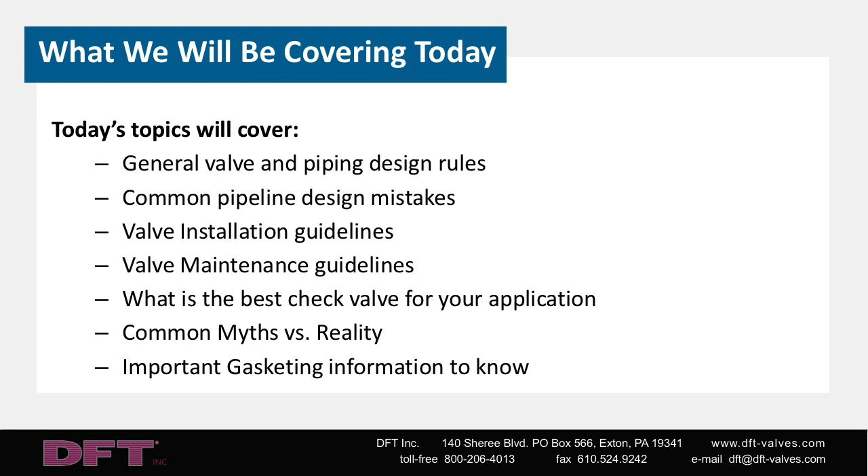With these 7 subject areas, there is a lot to get into, but it makes the most sense, at least to me, to talk first about just some general design rules for piping and system design that will lay a good foundation for what we need to talk about next. And we'll probably set the stage for maybe some questions that'll pop up. If you have those questions, please feel free to send them in. There is information contained in the webinar information up front that will give you the email address to send your questions to. If I don't get to answering those questions during this webinar, I will absolutely follow up with you afterwards and send you an email and try to give you a good answer or clarification on that particular question that you had.

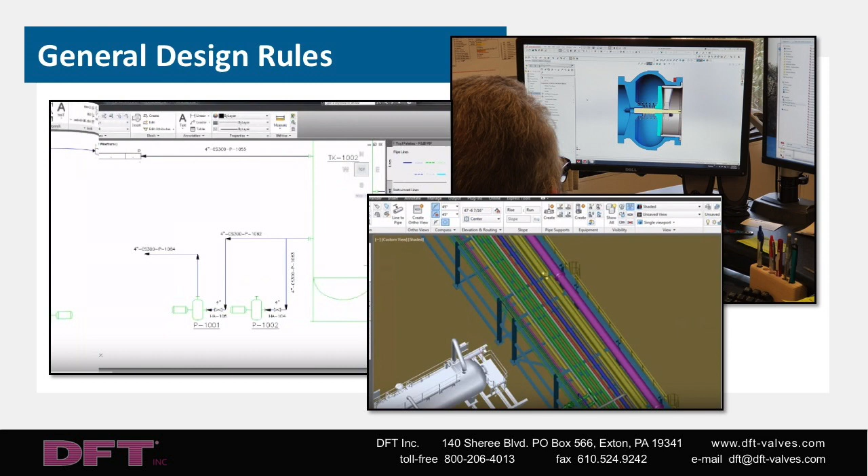So what is the best location to place a valve in a piping system? It should be pretty straightforward, I guess, that all valves will work best when installed in a non-turbulent flow condition. But if it was all that obvious, then maybe I wouldn't even have to state that up front. We recommend that you have 5 nominal pipe diameters, or 5 times the nominal pipe size of straight pipe, both upstream and downstream of the valve.

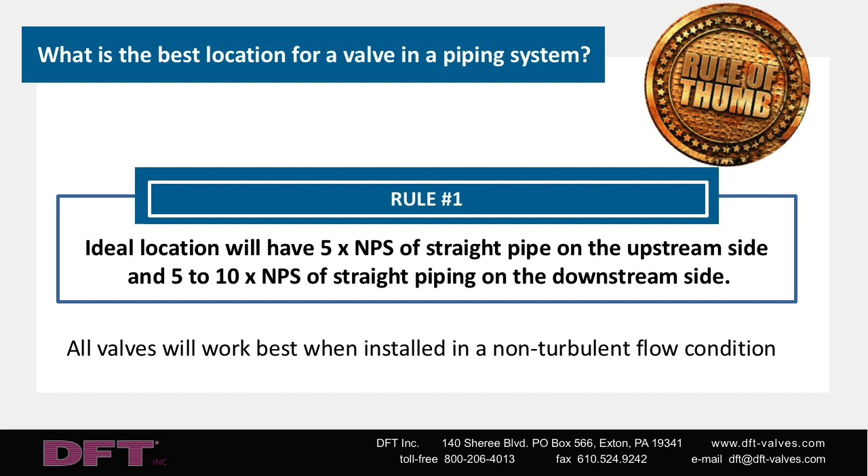We understand that this may not always be possible, and DFT has a very robust design for our products, which allows these valves to be installed in less straight pipe than that. But generally, all valves will work best when you have 5 times the nominal pipe size of straight pipe upstream, and at least 5, more is better, but at least 5 diameters of straight piping on the downstream side of the valve. So I called the last slide rule number 1, and that is the 5 diameters upstream and at least 5 diameters downstream of straight pipe to have a good location to install a valve.

Rule number 2 is that properly sized check valves are essential for optimum system performance with minimum maintenance required. All check valves require pressure from the fluid velocity to open the valve and maintain a stable position. The minimum pressure required to open a check valve is called the cracking pressure, and you probably need 2 times that differential pressure to get the valve from its cracking pressure to its fully open position.

So I said rule number 2 is properly sized check valves are essential. Well, what is the minimum flow rate that a check valve can handle? And the answer to that is that you really have to perform flow sizing calculations for check valves. It's every bit as important as doing the sizing calculations that you do for on-off or control valves within your system. And you have to keep in mind that it's the fluid pressure that opens the valve. There's no other actuator that's going to open or close the valve other than what's going through the pipeline.

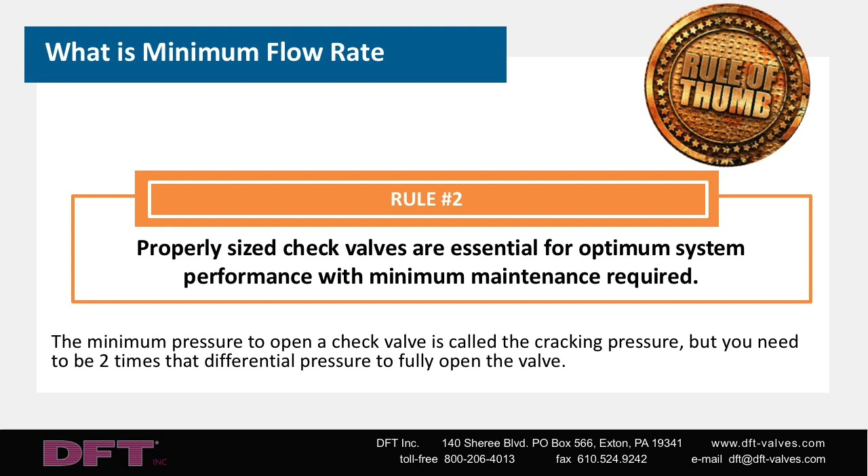So if you can keep rule number 2 in mind at all times, you can save yourself a lot of headaches with check valves that just don't seem to work. So my last of the rules, which is rule number 3, and you can breathe a deep sigh of relief. There's only 3 rules to remember. Has to do with horizontal versus vertical pipelines, and does it really matter in terms of valve placement?

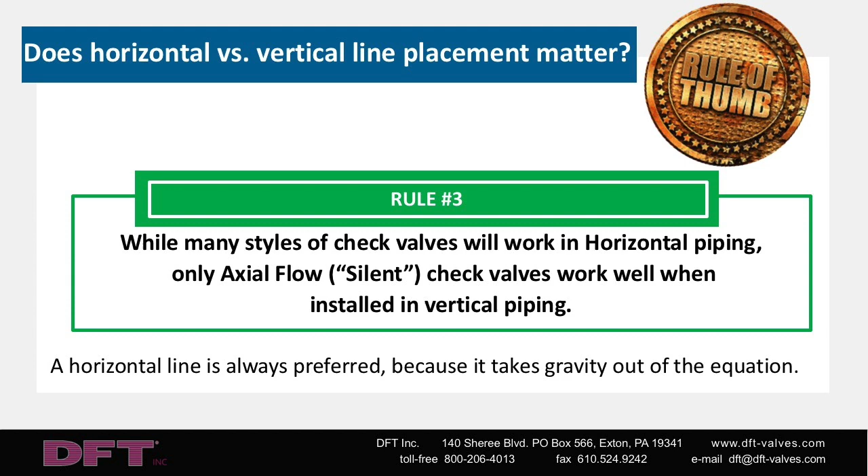And it really does. A horizontal line is always preferred because it takes gravity out of the equation. Many styles of check valves will work in horizontal pipelines, but only axial flow or silent check valves work well when installed in vertical piping. And in vertical piping, you also have to consider, is flow going up or is flow going down? Because that really does make a difference in some of the force balance dynamics that are going on within the valve itself. So try to install the valves in horizontal lines, but when you can't, if it's a vertical line, the best valve for a vertical line is always going to be an axial flow or silent check valve.

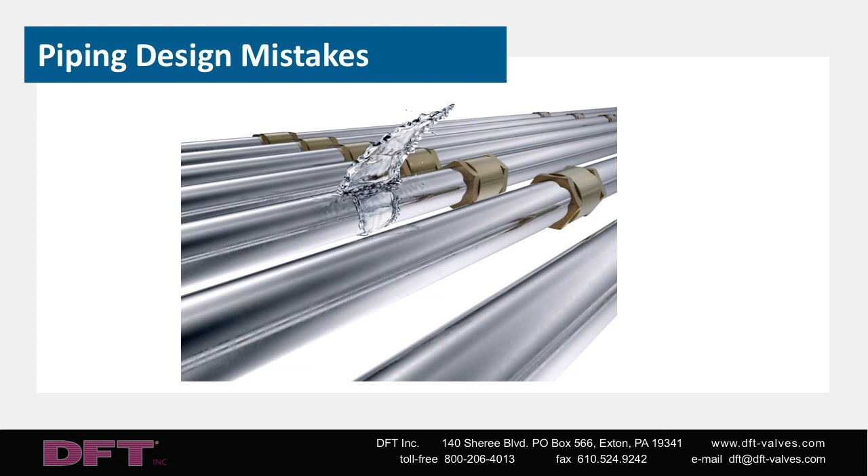So with those 3 rules in mind, let's move on to what I call piping design mistakes. And I'm going to put some quotations around that phrase. I'm not trying to be too forward with that, but we really are dealing with mistakes. We're trying to cram the valves into small, tight spaces, and it's just a mistake that if there's any way to avoid it, it should be avoided. In the upcoming slides, I'm going to give you some design rules that really follow commonly accepted good piping practices. So let's start with choosing our valve location wisely.

And for that, we need to go back to rule number 1. The ideal location should be 5 diameters of straight pipe upstream and downstream of the valve. Valves that are too close to pumps, elbows, expansion joints, or even other valves can cause problems. All of these upstream of the valve will cause turbulence, which can lead to instability of the disc of the check valve, and that will in turn lead to wear and component failure in time. So always keep rule number 1 in mind that 5 diameters upstream, 5 diameters downstream is a good place to put the valve. It obviously means that you need 10 diameters total length minimum to put any valve, but that's basically true whether we're talking about check valves, ball valves, control valves, any kind of valve. It really needs a laminar flow situation to give you the optimum performance.

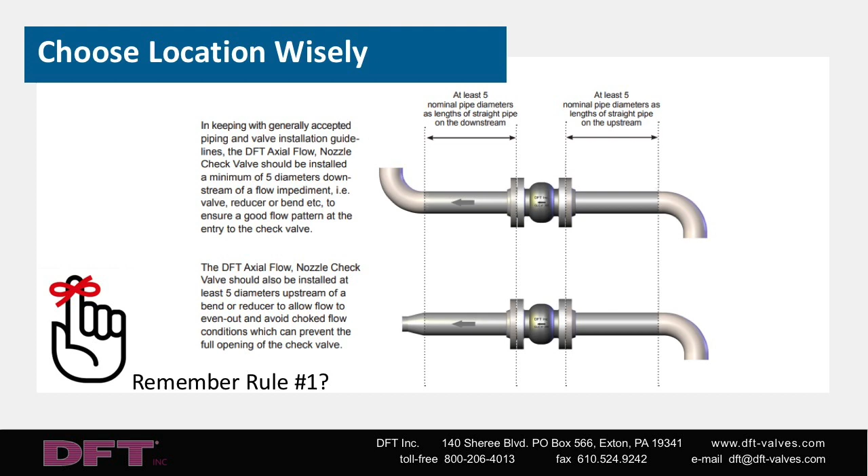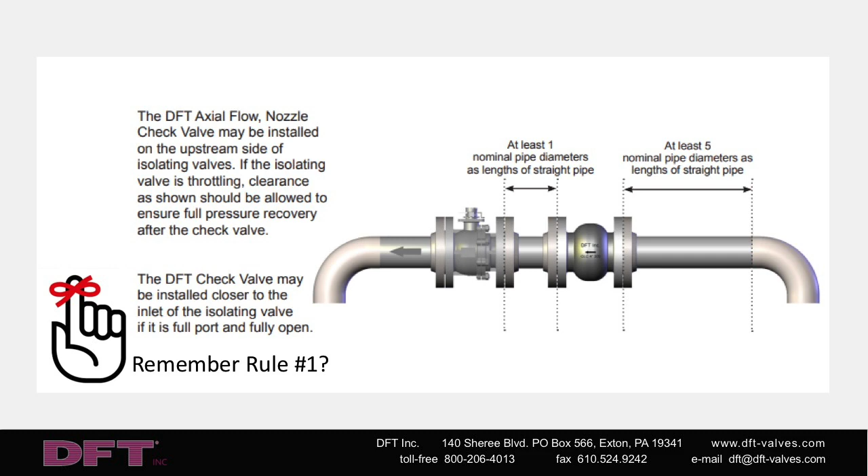The DFT axial flow check valve can be installed on the upstream side of isolating valves. If the isolating valve is throttling, clearance, as shown, should be allowed to ensure full pressure recovery after the check valve. And that's just to make sure that you don't have some turbulence coming through the check valve that's going to upset how the downstream isolating valve is then working in terms of its throttling capability. We do provide a very robust design, but even with that, valves create turbulence for other valves. And we need to keep rule number 1 in mind, that you need to have a little bit of straight pipe in between valves to ensure that the flow can restore itself to a laminar situation. Flow conditions are very important, and you always need to do the sizing calculations.

Just blindly assuming that you just matched the nominal valve size to the nominal pipe size and not performing any sizing calculations will cause you trouble in a lot of circumstances. Make sure that your flow conditions will be sufficient to fully open the valve under minimum flow, maximum flow, and normal flow conditions. This will ensure optimum valve performance with minimum valve maintenance. And for this, I'm going to ask you to go back and remember Rule 2, which says that properly sized check valves are essential for optimum system performance and minimum maintenance.

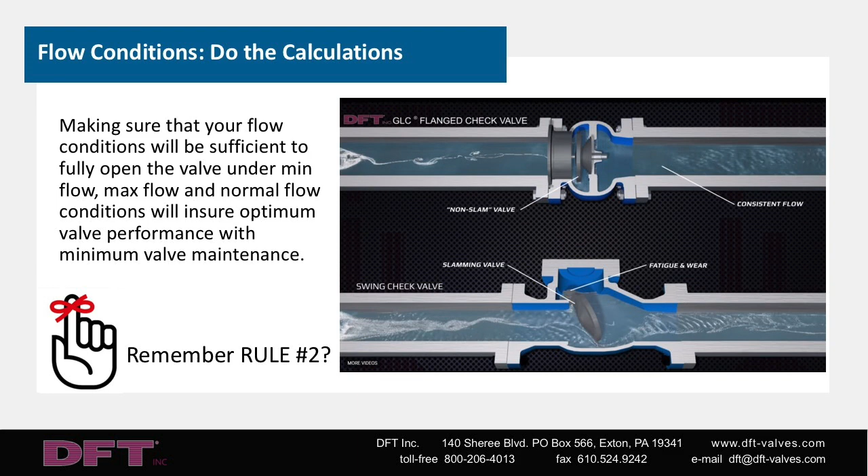Let's go back for a second and think about rule number 3, which was the vertical versus horizontal line selections. Installing swing check valves in vertical pipe runs is going to cause you a problem almost every single time. And the reason for that is that you're dealing with gravity. The internals of the swing check valve will respond to gravity, and flow is going downwards in a swing check valve.

It will always be open and not do its job. If you have vertical lines with flow going up, then of course you're dealing with another situation where gravity may cause the disc to slam against the seat, leading to potentially severe water hammer. Only axial flow check valves will perform well in vertical piping locations, but consideration has to be given to if the flow is going up or down in that vertical pipe run.

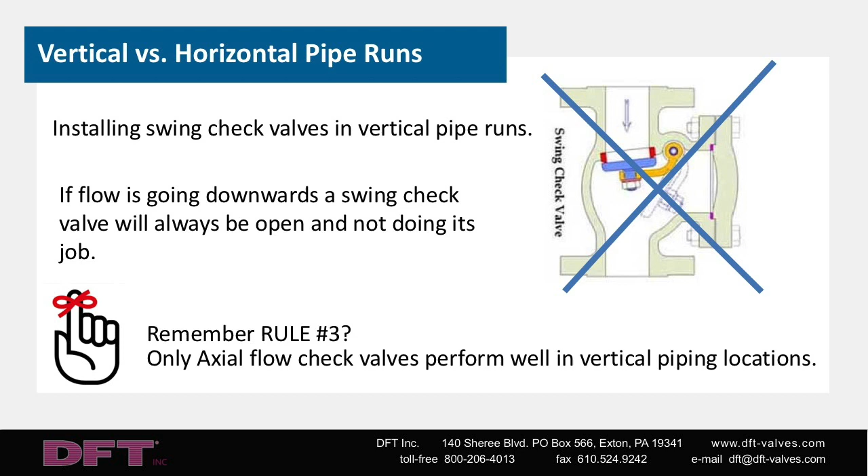So while we're talking about vertical versus horizontal lines, it kind of leads us into the subject of water hammer. And there are some simple solutions for water hammer that we want to discuss right now. In vertical piping, the easiest thing to do if you have water hammer is to replace the swing check or double door valve with an inline axial flow style check valve.

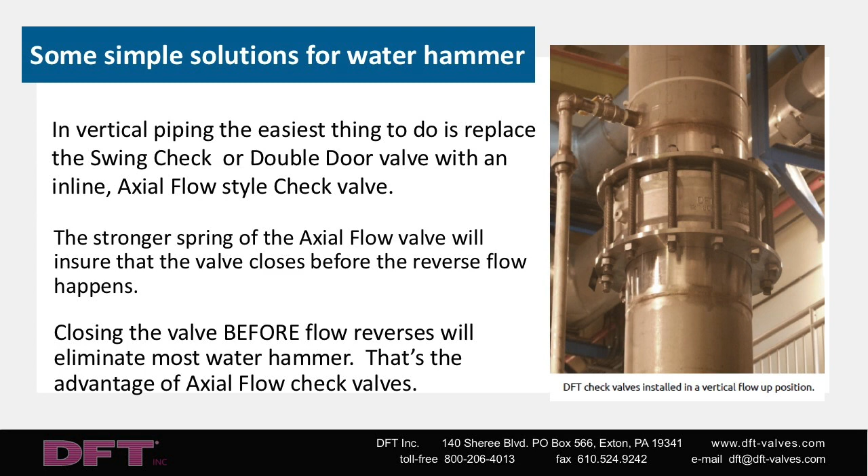The stronger spring of the axial flow check valve will ensure that the valve will close before the reverse flow happens, and that's very important. Closing the valve before flow reverses will eliminate most of the water hammer, and that's the real advantage of the axial flow style of check valve. You have to just keep that in mind, that the spring is helping to close that valve and is opposing the flow while it's going forward, but it's also allowing the valve to close during that forward flow so that we avoid the reversal of flow, which is going to lead to the water hammer situation.

So we've talked about some guidelines for better piping designs and how to avoid some common mistakes that lead to valve problems. Let's talk about good installation practices next.

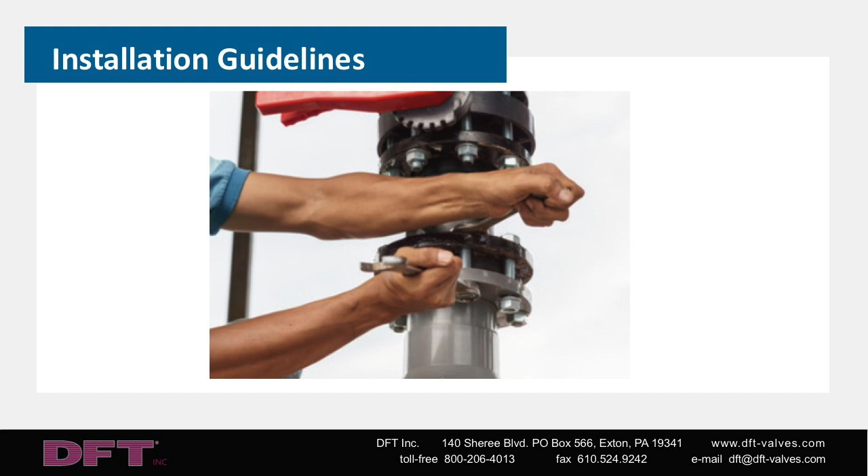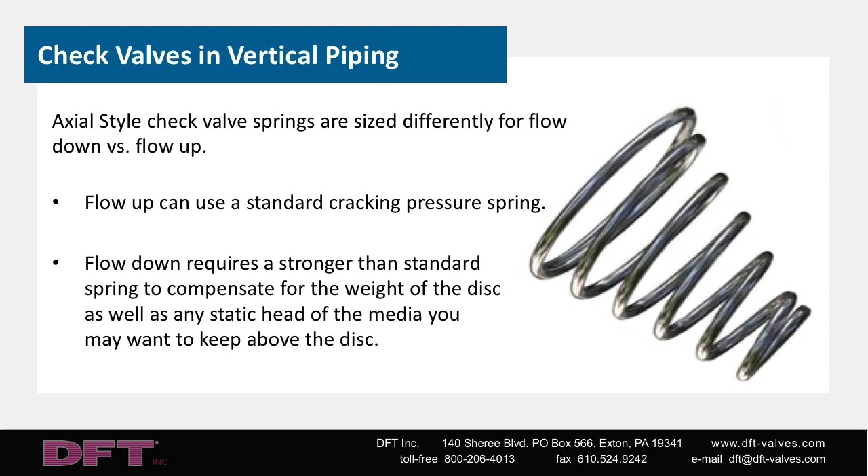Check valves that are installed in vertical pipelines, as I said before, are sized a bit differently for flow up versus flow down. And basically, that's because the spring has to be adjusted based on the effects of gravity. Flow going up can use a standard cracking pressure spring in most circumstances. However, flow that goes down may require a stronger spring than the standard spring to compensate for the weight of the disc, as well as any static head of the media that you're trying to keep above the disc.

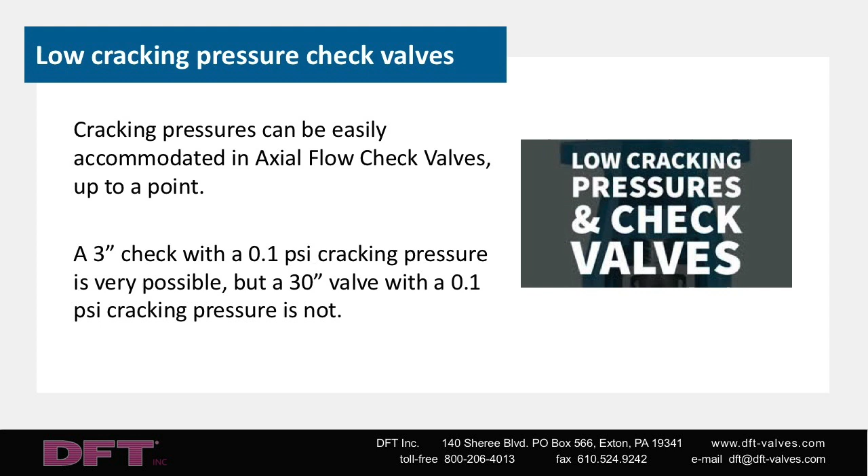So keep that in mind, that flow down may require something a little different than the standard off-the-shelf axial flow check valve. And sort of on a related subject, it is possible that axial flow valves can have low cracking pressure springs, lower than the normal standard off-the-shelf variety. That can easily be accommodated up to a point. For instance, a 3-inch check valve with a 0.1 psi cracking pressure is very possible, but a 30-inch valve with a 0.1 psi cracking pressure may not be possible. It all relates to the physics and friction and everything that's going on dynamically within the check valve. But we can accommodate low cracking pressures and do that all the time, for instance, on condensate return lines where they're being gravity fed back to a condensate pump. Low cracking pressures are essential to good pump operation in those kinds of situations.

The sealant material needs to be used but not overused in all situations, and you need to be careful that you don't push it inside the valve and gum up the disc or the spring, or if it's a ball valve, gumming up the ball and the seat and causing all kinds of problems. So a little is good, a lot is bad.

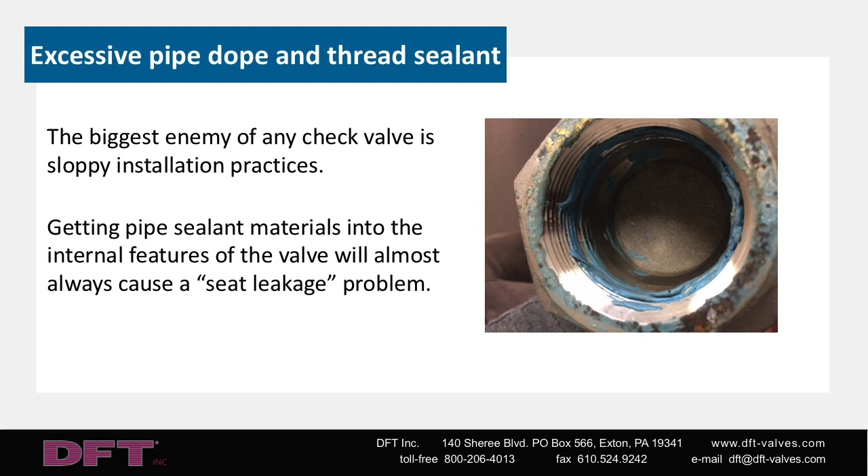One problem that we see a lot is that valves may have to be removed from a piping application for whatever reason. If you put your wrench on the wrong half of that valve to unscrew it out of the line, you may actually wind up disassembling the valve as you do that by unscrewing the two halves of the valve. So it's important that when you need to remove a screwed-in type valve from a piping system, you put the wrench on the appropriate end of the valve that's going to prevent it from unscrewing itself. The effect of doing that could result in a body seal leak because when you screw the two halves back together, and maybe you've only cracked the two apart slightly, you may pinch the body seal O-ring that's between the two halves. So please, please, please pay attention to the flow direction in the piping before you start installing the check valve.

Make sure you put it in the right way the first time. And if you do have to take it out, put the wrench on the correct half so the two halves of the body don't become disengaged from each other.

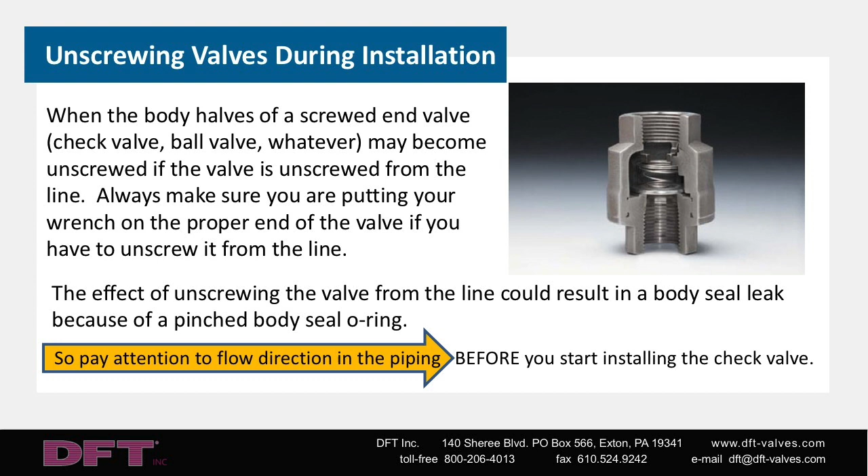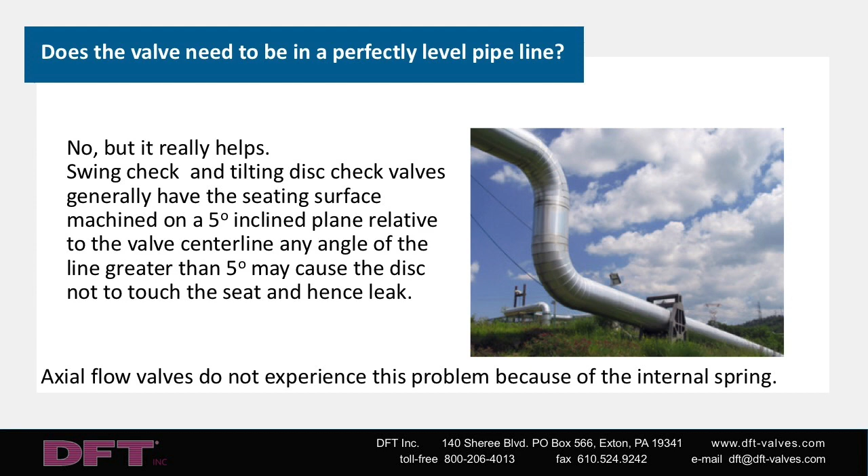Does the valve need to be in a perfectly level pipeline for horizontal applications? There's a yes and no response, but I'm going to say no, it doesn't matter, but it really does help. Swing checks and tilting disc check valves generally have a seating surface machined on about a 5-degree inclined plane relative to the valve center line. If your pipeline is at any angle greater than 5 degrees, that may cause the disc not to touch the seat and hence leak. Axial flow check valves don't experience this problem because there's an internal spring that keeps the disc pressed against the seat. So that's the no part of the answer, but the yes part pertains more to other styles of valves where there's no spring, and gravity is your friend in trying to help seal the valve.

Still on installation guidelines, my last thought is to take a final look. Clean out the lines before you button up the pipeline. It may seem obvious, but you'd be surprised what gets into the pipe during construction. There could be weld rod, wrenches, 2x4s, just about anything you can imagine, and a lot of things you couldn't imagine. It all damages the seating surfaces and delays startup. So always take a final look before that line gets closed up and make sure there's nothing in it that shouldn't be there.

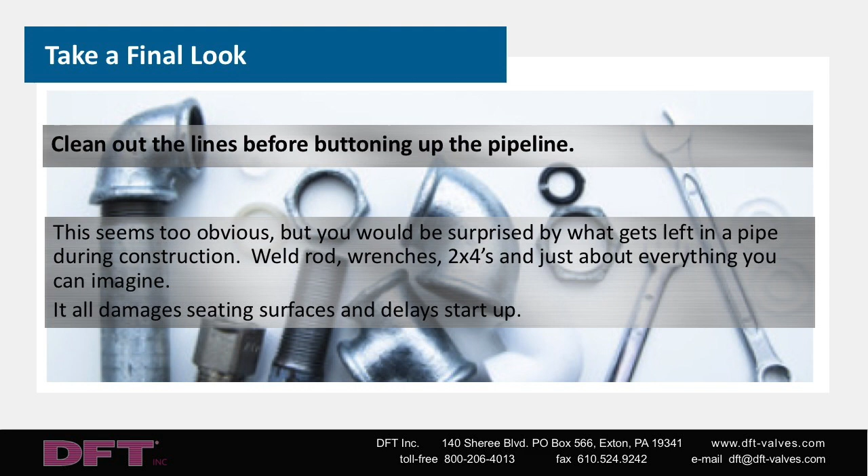Okay, so let's move on a little bit and talk about valve maintenance guidelines.

Should I be using oils, greases, or lubricants when doing maintenance on my valves? The answer is a bit of a cop-out, but always follow the manufacturer's recommendations and read their maintenance instructions before you start. Some valves require these kinds of oils, greases, and lubricants, and others do not. As a general rule, whenever possible, I'd say do not use greases or lubricants because their presence may be detrimental to your process. It's best to select valves that don't require these kinds of additives to help their performance. Always go with a valve that can be used in a clean, dry, non-lubricated environment, because it will save you a lot of headaches with your process later on.

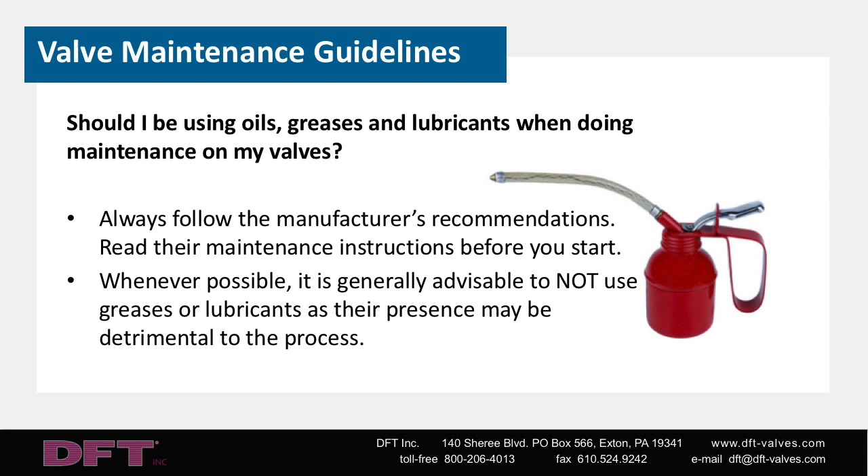Always thoroughly clean the valve while you have it on your bench for maintenance. The cleaner it is, the better it will work. Greases and lubricants, loose rust or scale on the cast surfaces all need to be removed to ensure that the valve, when installed, will work as good as it did when you rebuilt it and tested it on your bench. It's kind of corny to say, but it's so true: cleanliness is next to godliness in this kind of situation. A clean valve will never cause you a headache during startup.

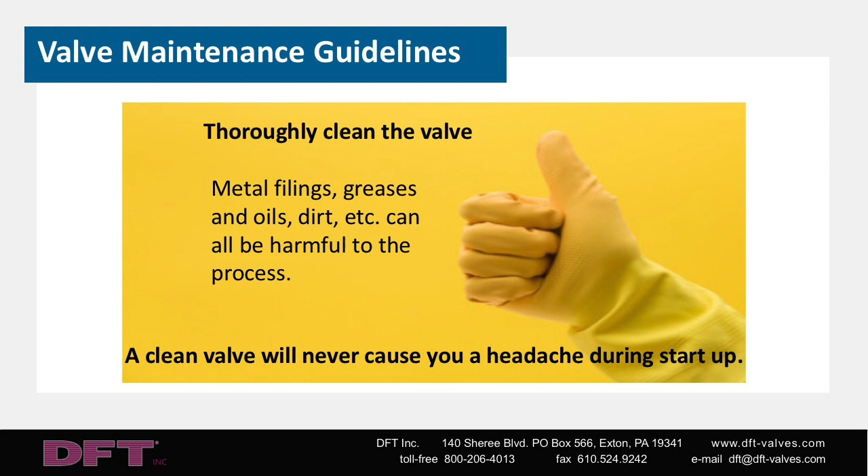I know I said it just a few minutes ago, but I'll say it again: always get the maintenance instructions for the valve you're working on. Even if you've been rebuilding valves for 30 years, the manufacturer may have special requirements you really need to know about. It's better to do the repair right the first time than to have to do it all over again, and I think nobody's going to argue with that sentiment. So always make sure you get the operating or installation instructions for the valve before you crack it open and start working on it.

All right, let's move away from valve maintenance for a while and think about how to choose the best check valves for your application needs. A lot goes into choosing the right valve for a given application, so I'd like to review some of the choices that go into picking the right valve.

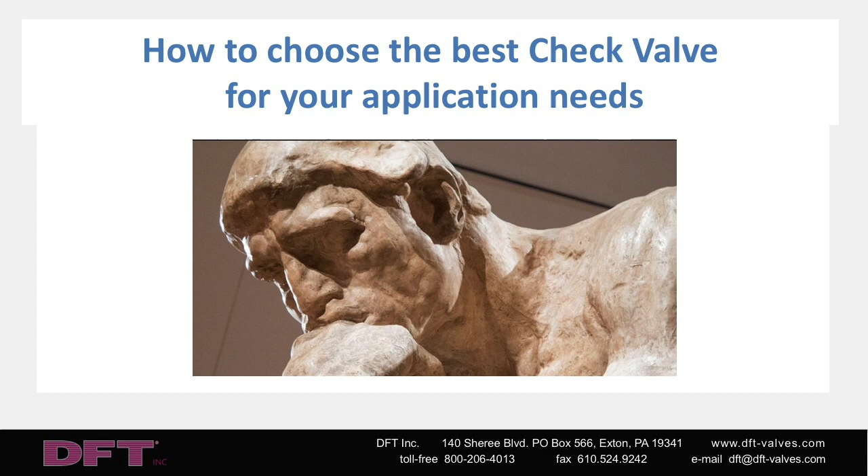Okay, location factors. I did say this earlier in the webinar, and I'll say it again: think back to rule number 1 and rule number 3. Trying to find the optimum locations in the system for your valves, and where they're going to be installed, is very important. Squeezing them in somewhere is only going to come back and haunt you.

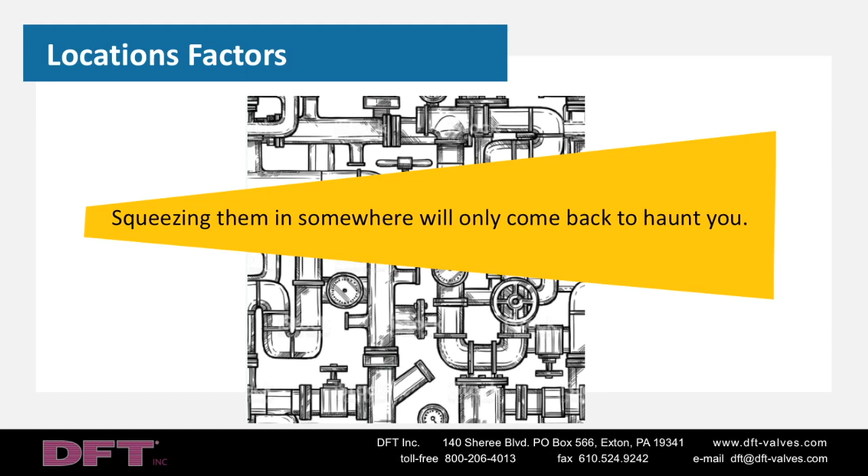Sizing of check valves is so important. I just find myself feeling like I'm overemphasizing it, but in reality, I never can. You have to remember that check valves that you specify and install are only going to be opened by the media that flows through the valve. So considering the min flow, max flow, and normal flow conditions is absolutely essential.

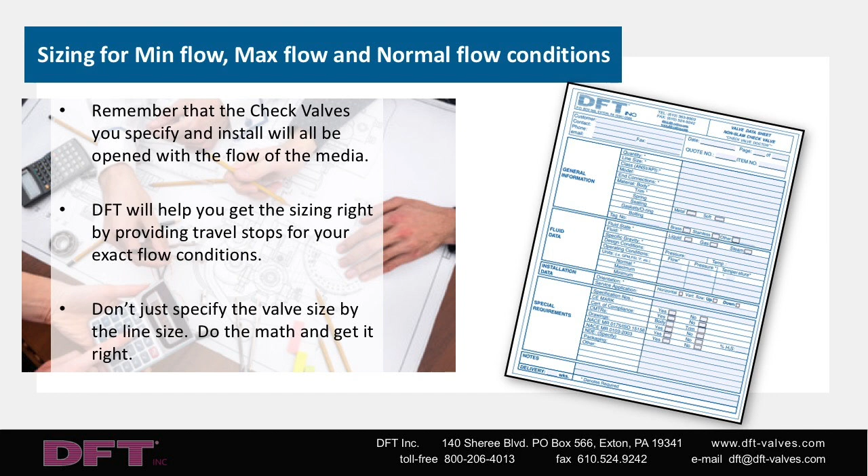If you need help with this process, DFT is there to help you with that. To get the sizing right, we can provide travel stops to conform to your exact flow conditions. Don't just specify the valve size by the line size. You need to do the math and get it right, because it will have its payoff in increased system reliability and decreased maintenance of the valves that are in that system.

So we're talking about choosing the right valve for the application that you have. And naturally, we have to talk about valve materials. Generally, the valve body material will match the pipe and flange material. So a carbon steel line will demand a carbon steel valve body. And that's really the most common in many applications. Probably a close second would be cast iron. And right after that would be stainless steel materials.

But it seems to me that, at least 2/3 or 3/4 of the time, you're going to be dealing with a carbon steel body material. And there are many choices within this family that are based on external environment as well as process temperatures. So carbon steel is not carbon steel. There's ones that are more suitable for lower temperatures, as well as ones that are more suitable for high temperatures.

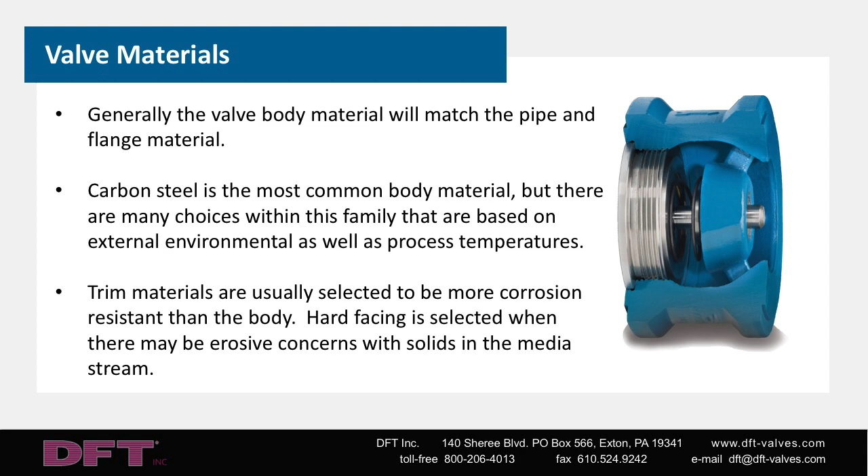Trim materials are usually selected to be more corrosion resistant than the body. Hard facing is another option that can be selected when there is more of an erosive concern. For instance, there may be solids in the media stream, and you want to prevent those solids from eroding the sealing surfaces of the valve itself. So as I said, the solids in the media may cause pitting or erosion on critical sealing surfaces of the valve. But there are fines and there are solids, and there's a big difference between the two.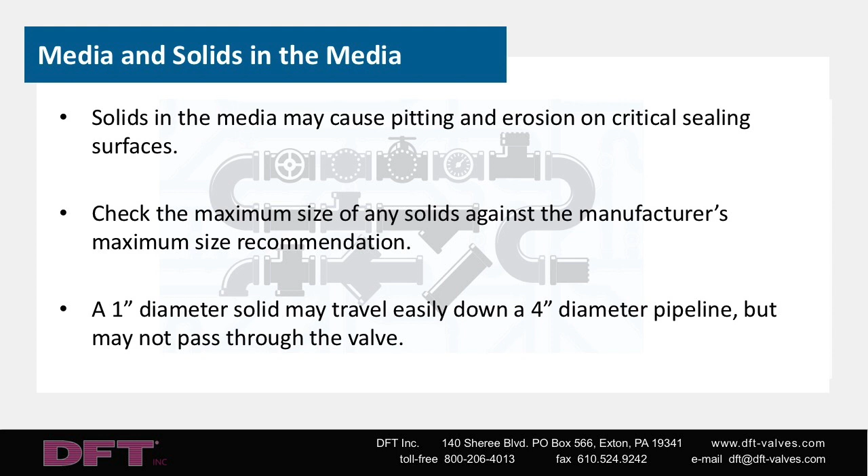You should check the maximum size of any solids against the manufacturer's maximum size recommendations. A 1-inch diameter solid may travel very easily down a 4-inch diameter pipeline, but it may not pass through the 4-inch valve. So consult the manufacturer and make sure that what's going through your pipeline will also go through the valve.

Okay, so we've given a lot of thought to choosing the right valve for the right application. Now let's spend a little time dispelling some of the myths that surround the selection of valves. And so let's talk about a few of those right now. So here's 2 very common myths about stainless steel. One is that stainless steel does not rust, and the other is that stainless steel is not magnetic. And both of those are false assumptions or false myths that need dispelling.

First is that rust on stainless steel is caused by free elemental iron that's resident on the casting surface, and it's particularly true with castings, whatever process they might be made by. There are a lot of different processes that are involved within the foundry itself, including shot blasting to clean and grinding, and they all leave free iron on the surface, which will eventually cause rust to appear. The solution is to pickle or passivate the casting, and that will remove the iron residue.

The other myth is that stainless steel is not magnetic, and that's absolutely not true. Cast stainless steel will also be very weakly magnetic due to the ferrite content of the microstructure of the cast material. And that's not true with a wrought material or a forging, but is absolutely true of a cast material. And both 300 and 400 series stainless steels will be somewhat magnetic, and you can put a magnet against it and you can feel the attraction of the magnet to the valve body. And it's not just the free iron on the surface, it's also the ferrite that's part of the microstructure of the casting.

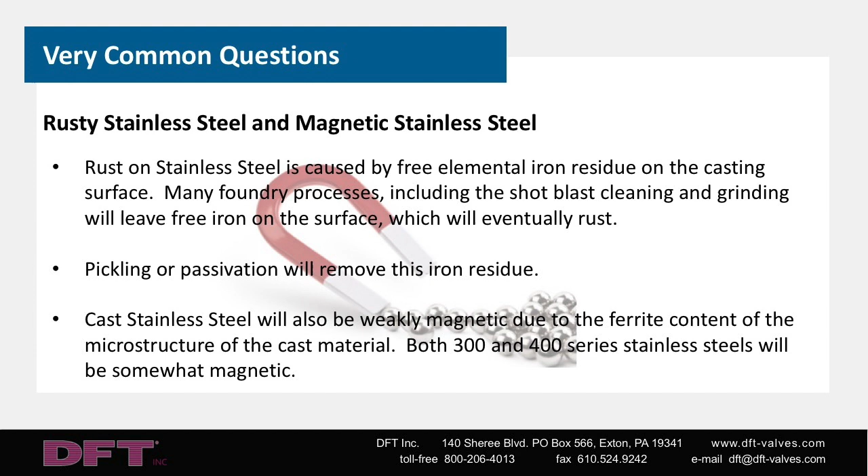Another myth to be dispelled is that higher CV is always better. And this goes back to rule number 2. When check valves are being selected, sizing the valve is absolutely important, and sizing the valve properly for the flow condition is of utmost importance.

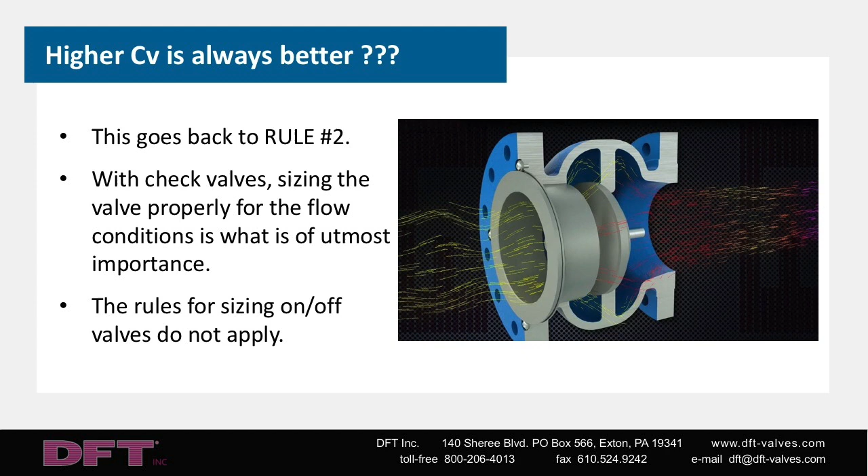The rules that you apply for sizing on-off valves do not apply to check valves. When you have an on-off valve, you calculate a desired CV, and you select a valve with a higher CV for that particular application. With check valves, you calculate your desired CV, and then you choose a check valve that has a slightly smaller Cv, which is the valve coefficient, and it's expressed in gallons per minute at 1 psi pressure drop. But you really need to apply the rules specifically for check valves, and that is selecting a valve with a CV slightly lower than your calculated CV.

So let's put aside the myths versus reality and set Merlin and the unicorn aside for a little while. And let's talk about gasketing and gasket information that's important to know. The gaskets in the piping system are as important as the valves themselves. And choosing the right materials and then installing them correctly is extremely important. With all the focus on fugitive emissions that we deal with, the gaskets have to be considered as well as any stem packings. And I'm going to talk about important gasketing information that you need to know in the upcoming slides.

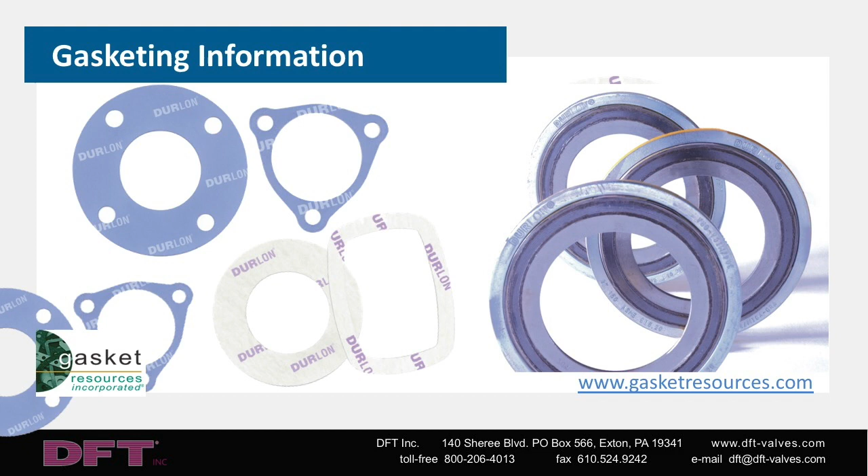Gaskets are chosen to be compatible with the temperature, the chemical composition of the media, as well as the pressure of the system. And to prevent leaks or fugitive emissions from the gasket joint, it's absolutely necessary to follow proper tightening procedures, as well as proper torquing steps and sequences in tightening down the gasketed joint.

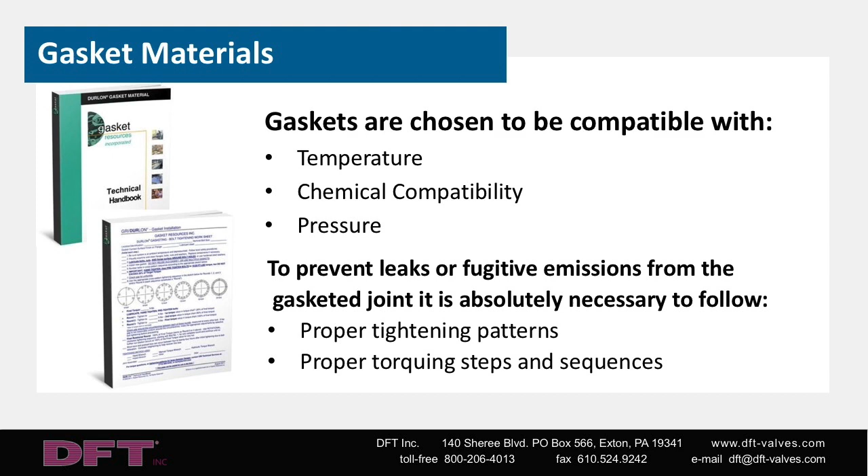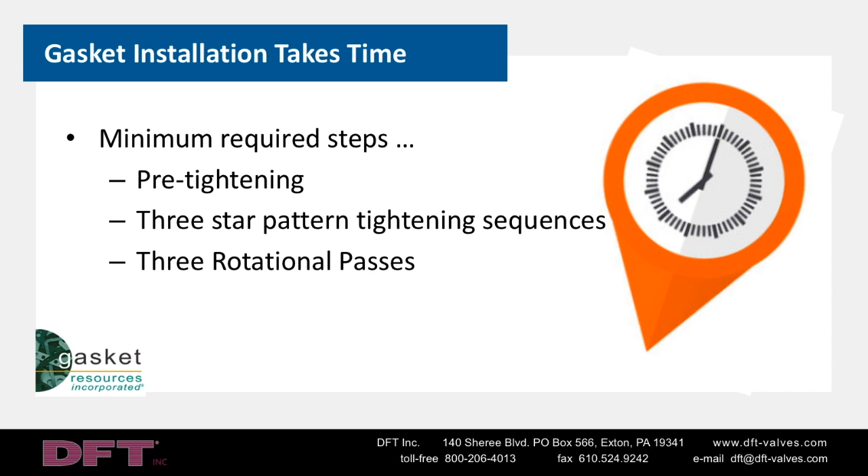One reason that we have gasketing problems is because it takes time to properly install a gasket. There are a few minimum required steps. There's pre-tightening. There's a 3-star pattern of tightening that as a sequence needs to be followed. And then finally, 3 rotational passes after having done the 3-star pattern tightening sequences. All need to be done. Many times we find that installers are just unwilling to take the time that is required. But the proper method has a few very important steps that cannot be overlooked or skipped.

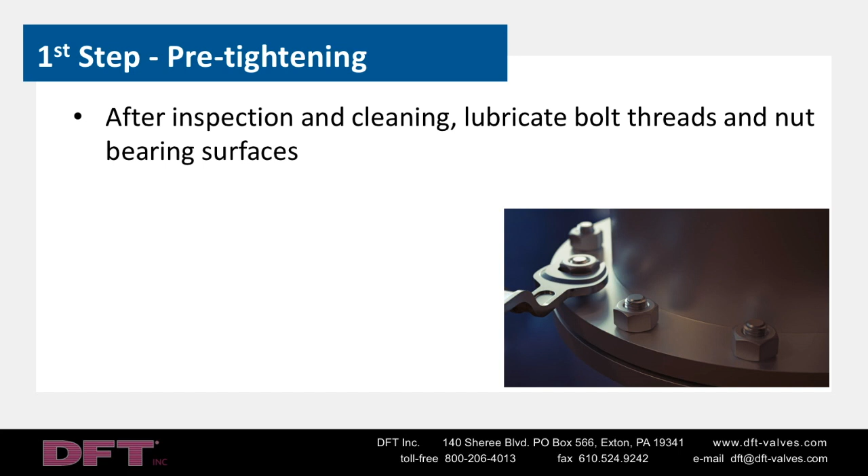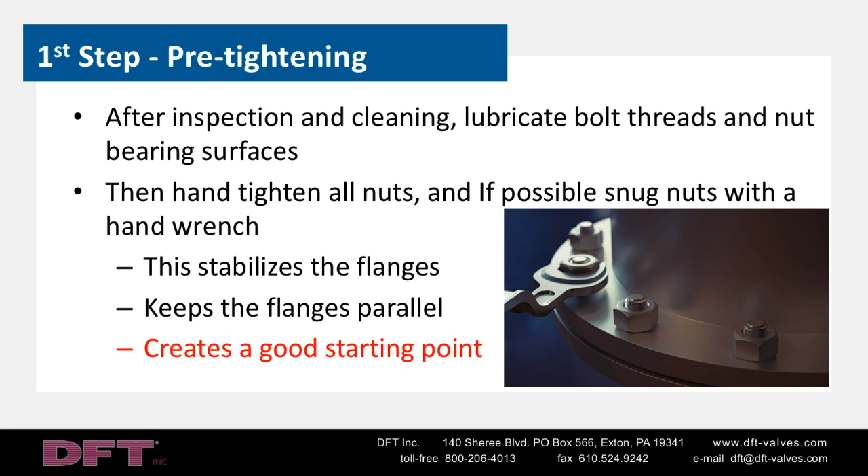The first step I call pre-tightening. First you need to inspect and clean all the bolts and threads and nut-bearing surfaces and lubricate them completely. And that means the bolt threads, the nut faces, and the washer faces. It's all very important. But the pre-tightening step is probably the most important because it stabilizes the flanges and keeps them parallel. So hand tighten all the nuts, and if possible, snug the nuts with a hand wrench. Again, this will stabilize the flange, keep everything parallel, and just give you a good starting point for a good, sound, tight gasket.

After the pre-tightening step, the flanges are stabilized and parallel. The next thing we need to do is perform 3 star pattern tightening sequences. This is where everyone else starts with their procedures. And this is also why our pre-tightening step is so important. If you've ever replaced a head gasket on a car or even tightened the lug nuts when changing a tire, you know that there is a right way and a wrong way to tighten the nuts.

In the star pattern tightening sequences, we give the bolts numbers so that we don't lose our place, and that's very important. There could be 8, 12, 16, there could be quite a number of them. So let's number them all so that we don't lose where we're starting. And we always start each sequence with the number 1 bolt. Doesn't matter which one it is, call it number 1.

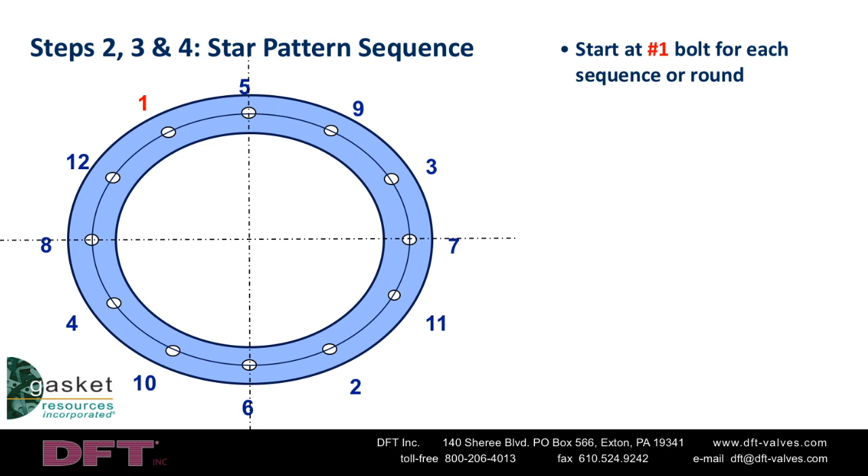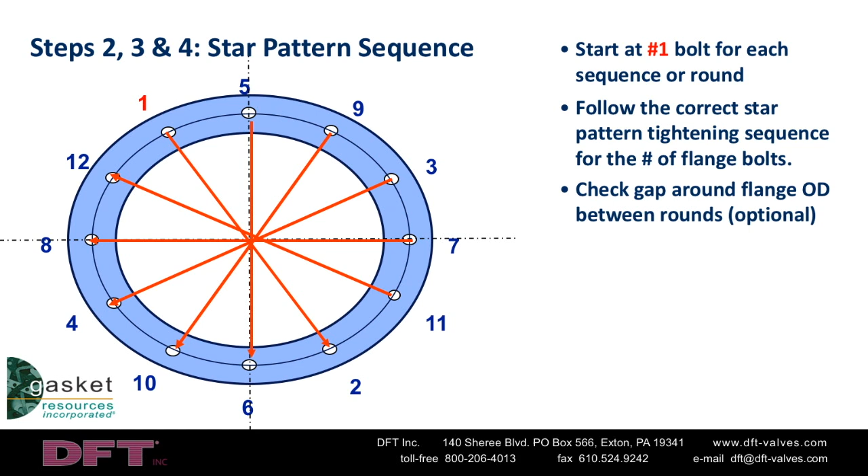Go around in a star pattern and go 1, 2, 3, 4 all the way around the pattern. You can identify this with a marker pen or whatever sort of marker you prefer. But follow the star pattern tightening sequences based upon the number of bolts for each of the 3 rounds, progressively increasing the torque, starting at 30%, then going to 60% of max, and then finally the full 100% torque value.

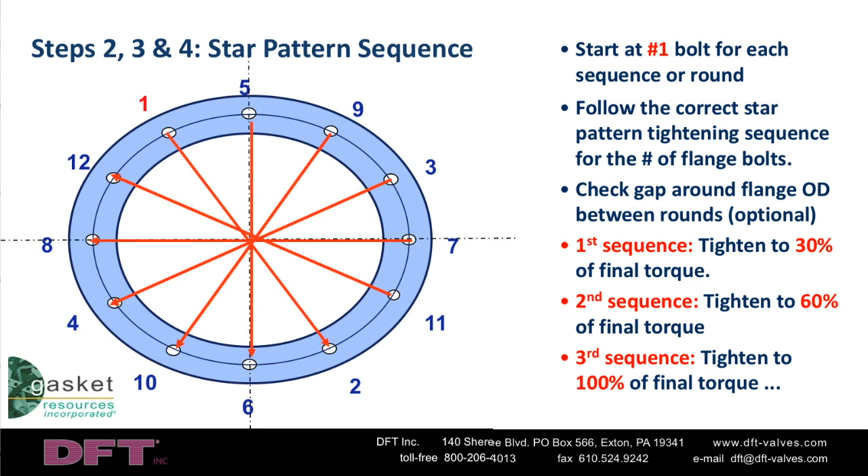The graph that you are looking at illustrates the bolt stress for each bolt after we have completed the 3 sequential tightening rounds. You can see that the stresses on the bolts are not quite equal, and they vary by 20 to 25%. And they are also not within the desired bolt stress range as indicated by the 2 red lines for upper and lower limits. In order to make the bolt stresses more uniform, there is one more step that's required, and it's very important.

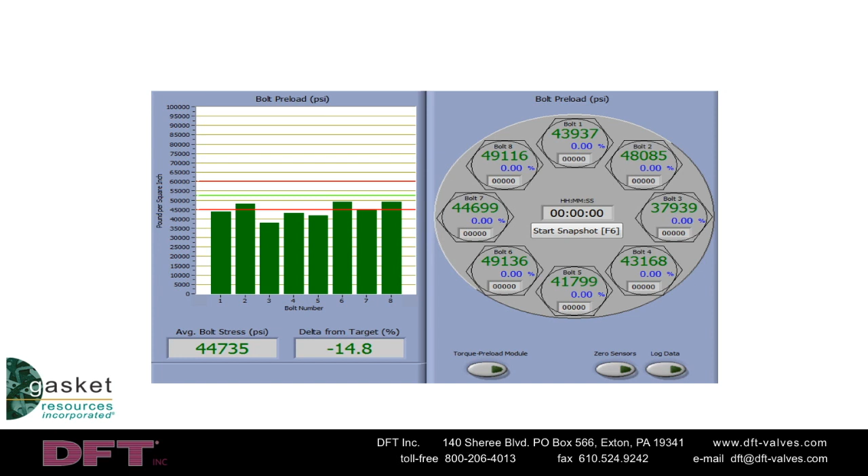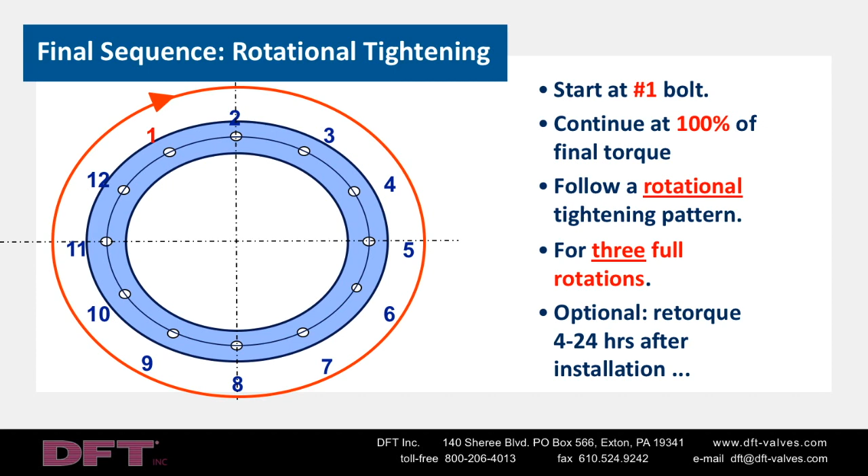The final sequence is the rotational tightening. And we start at the number 1 bolt, and we continue with the 100% final torque value. In this last step, the goal is to keep the wrench setting at that full torque setting, and this time tighten in a clockwise rotational pattern, starting with number 1. We recommend that you go around 3 full times, and this will bring the loads of the bolts into kind of an equilibrium status. Optionally, you could also and should also consider retorquing after between 4 and 24 hours to compensate for any gasket creep that may have occurred, which will relax the stress in the bolts.

As you can see in this graph, the load on the fasteners are now well within the range of acceptability between the high and the low limit, and the stress is much more uniform as well. The point we're trying to get to is that when we get a consistent load on the fasteners going around the flange, we are also getting consistent, even compression on the gasket as well.

You've created a series of springs around the flange. They look like bolts, but they act like springs. And the bolts are stretched uniformly around the flange, and all that they want to do is go back to their original shape. And this is what is known as the clamping force that holds everything together. So it's so important to go around those extra 3 times in a clockwise manner and just keep everything snug. And as I said, as an option, you can even consider going back 4 to 24 hours later and rechecking all the torques to compensate for any gasket creep that might have occurred.

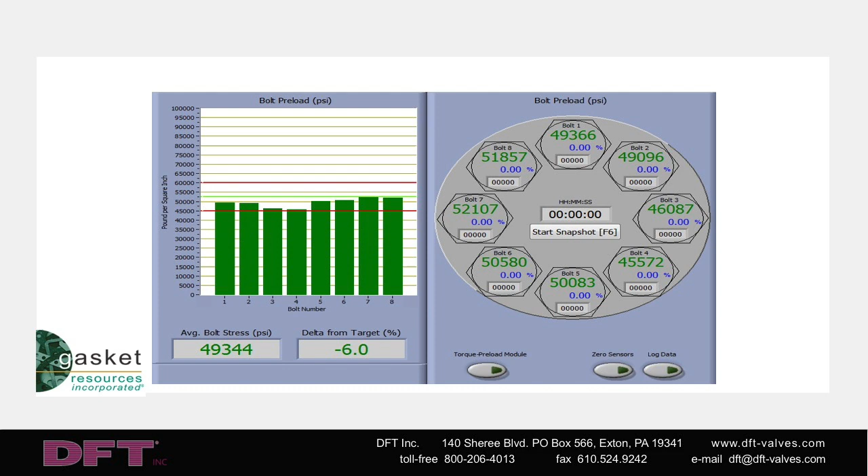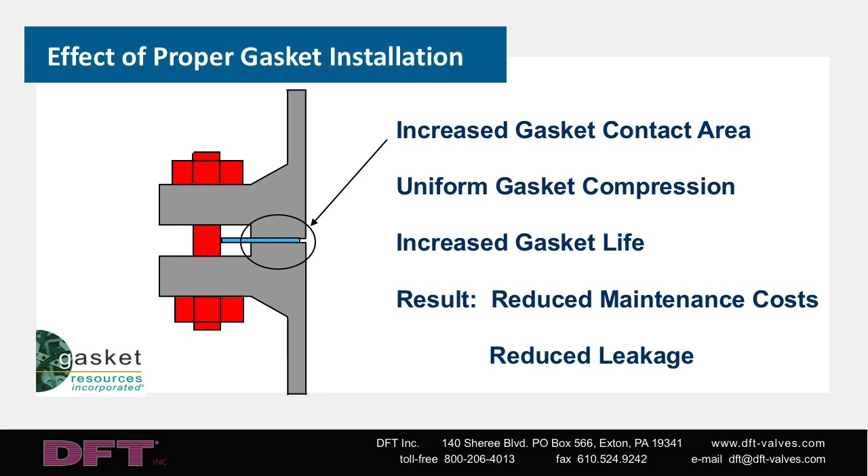By using good installation practices, you achieve an increased gasket contact area as well as a uniform gasket compression. But most importantly, you've increased the life of the gasket. Secondarily, you will also reduce leakage, which of course means reduced maintenance. All that leads to more productivity for your plant, which means your workplace is more productive, more environmentally compliant. And as we all know, in these times, environmental compliance, reducing fugitive emissions is extremely important.

Well, we've covered a lot in this webinar, and I hope it's been interesting to you. We've talked about general design rules. We've talked about common piping design mistakes. We've discussed some solutions for water hammer as well as valve installation guidelines and valve maintenance guidelines. Choosing the right valve for the right application. We've dispelled some myths and compared them to reality. And finally, we've covered some gasketing issues. All of this I hope you found very important.